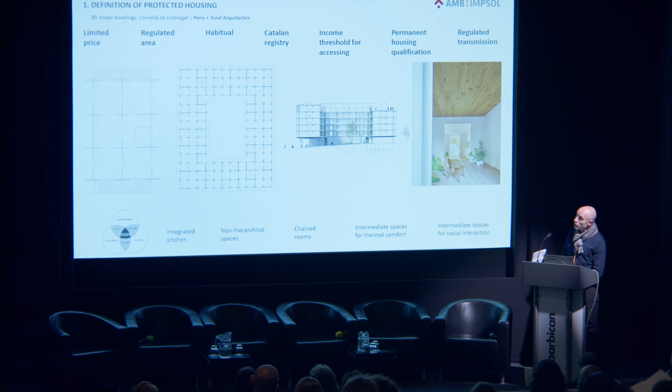This is a very special building for us. It's by Marta Peris and José Toral. It's 85 mixed dwellings in Cornellà de Llobregat. And as you can see, the unit of the building is not the dwelling, because it is the cell. The cell is 3.5 by

3.5 meters. It is inspired, or the authors say that it is inspired by a Japanese room, which is the more flexible one. So it's more or less 12 square meters, and moreover, every unit can be connected to the next one.

The standard type is 6 modules, so it's more or less 75 square meters, but it can be 4 modules, where the corner models are usually 4 modules. So depending on the model, it's 2 bedrooms or 3 bedrooms. You can see that there are 2 balconies.

One of the balconies gives facade to the inner courtyard, and it's the entrance. So that means that you can enter your dwelling by 2 spaces. So, for example, if you are a young architect and cannot afford to rent external space, you can put your office there, and you can receive your customers directly in a separate space of your house. So it's a very flexible model of living, because everything can be done there, and moreover, the units can change if things change, if things change during the years.

So this is the floor plan. We have 4 stories, and it all gives to an inner courtyard where the entrances are. This is an image of the building finished, and

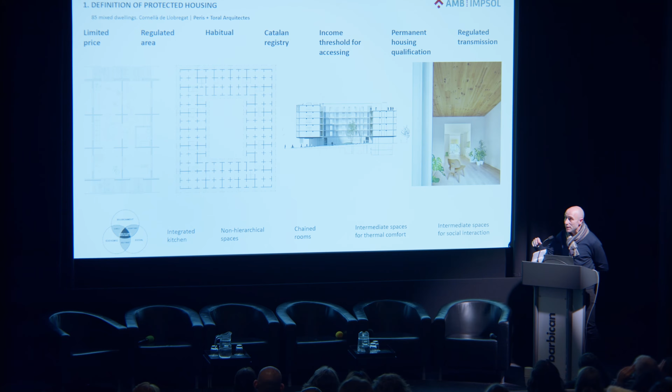And we are pushing towards intermediate spaces, social intermediate spaces, or thermal intermediate spaces. And these are images of the building. It's a famous building because we constructed it in 2020. It was designed in 2017, so more or less, so previously to the pandemic.

And it's constructed in timber. This building costs more or less 1,000 euros per square meter. That means that it's very, very cheap. But it's not cheap because in Spain, construction is cheap because it's cheaper than here, but not very cheap. So I think that architects are very clever.

Architects and the whole team, I think, to conceive this kind of building, everybody has to break their prejudices and accept new things. For example, the fences are very basic—there are thousands of meters of fences in this building—so we go with the cheapest option, constructed in timber. In Spain there's a lot of sun, so solar protection is very important for us, so the building is full of solar protections.

Continuing about the regulation, social housing in Spain can be for sale, for rent, targeted social housing, or cession of use—it's like we can sell the dwellings for a determined period of time. It can be cooperatives, but I'm not going to talk about cooperatives since that's been previously explained. And it can be like urban masoveria. It's strange, but it can be.

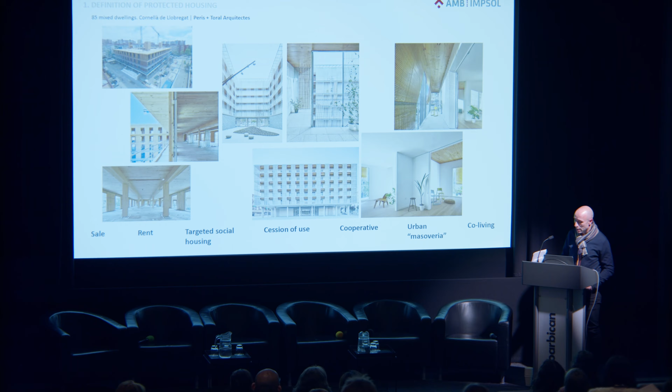There's a place and somebody pays by doing some works in the building, for example, and there are some models of co-living. This building is a mixed building between sale and rent, so 30% of the building is for rent and the other part is for sale. That means we paid for the land, and since we are non-profit organizations, we have to balance our economy. That means that if the municipality gives us the land, we promote social housing for rent, but if we have to pay, we have to balance our economy, so depending on the cost, we need to sell more dwellings.

So, housing designs and characteristics. We understand that social housing is permanent social infrastructure. What does that mean? Every building will remain there for more than 100 years, probably more than our lives. So we know who we are and how we live nowadays, but we don't know anything about what will happen in 20 years. That's why we are always pushing towards flexibility.

I think one of our main aims is architectural quality, so we follow exemplarity in our architecture, always controlling the cost. Our buildings have to be exemplary in energy efficiency as well, flexible, inclusive, and neutral, as I mentioned before. So we ask architects that all the spaces where housework has to be done have to have the same quality as the main spaces.

And we would like to generate identity in the building because we feel that helps people create communities. As I said before, we have to be self-sufficient financially, and that's the reason all the buildings have to have low maintenance.

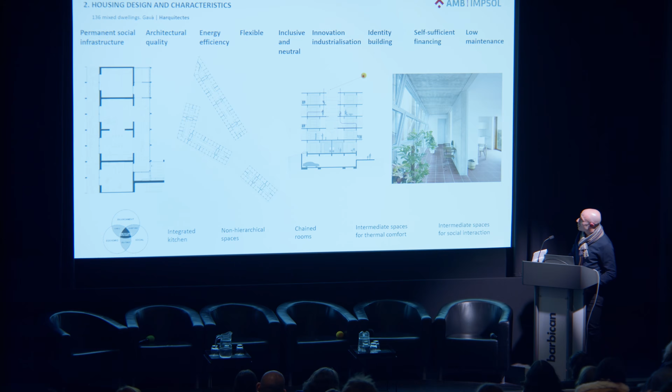We are trying to generate communities, so we always ask architects to come to the meetings in order to transmit directly the values of the building to the community. As IMPSOL, we explain who we are and why we are doing architecture like this, and we ask architects to come with us to explain. That's why we always ask in the competitions that the building has to allow a hall or a space to hold, at minimum, meetings for all the inhabitants.

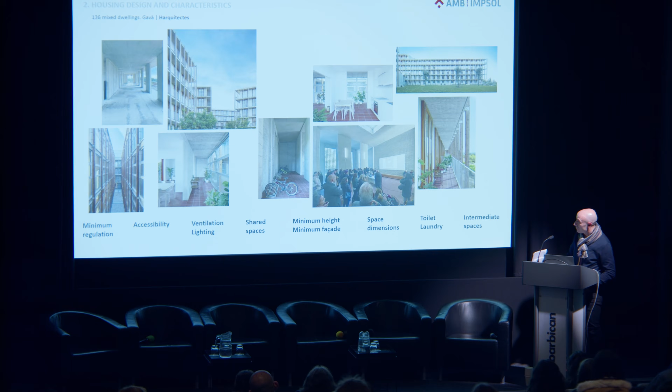How do we do that? We work as if we were technical services of the municipalities around Barcelona. So there's a decision and a commitment with municipalities where they give us the land or sell us the land, and there's a definition of actions, because sometimes we can go directly to the competition, or sometimes we need some planning. So there's the competition, which is a key point for us—I'll explain later. Then there's the implementation, the commercialization, always regulated by law, and the delivery. And then there's an important phase for us, which is maintenance and dissemination.

That's where we are pushing now a lot, because we felt that we explain these kinds of buildings to lots of places, but most of us are architects or linked to this profession. We need citizens to know about these buildings, why we are doing them, and what it means to live in a building like this. If we create identity, if we get people to feel proud of living there, they will transmit this value to others, and we gain power to continue doing these kinds of buildings.

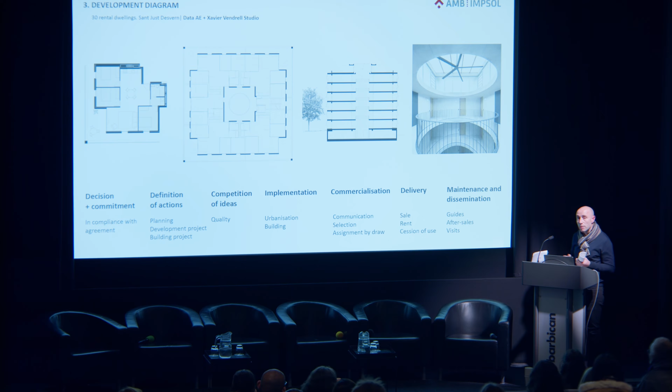For example, in this 30 rental dwelling building, we have an atrium inside that captures sun during the winter, and this ventilator pushes the air downstairs where dwellings can interconnect, or in summer it's the opposite. So we have some windows downstairs and we are creating crossing ventilation, but people have to understand how to use this kind of dwelling.

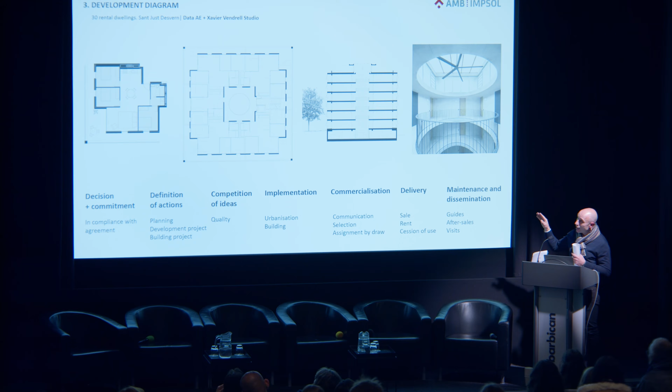Typologically, as you can see, in most of our dwellings the corridor disappears, so they are very optimized plans where all the bedrooms have more or less the same surface, between 10 to 12 square meters. Then you have the dining room and living room, which can be changed, because the dining room can be on the outer side, and inside we can have other uses.

Note that here the terrace has a big size, so it's the same size as a double room, more or less 12 square meters, because in Spain we love life outside.

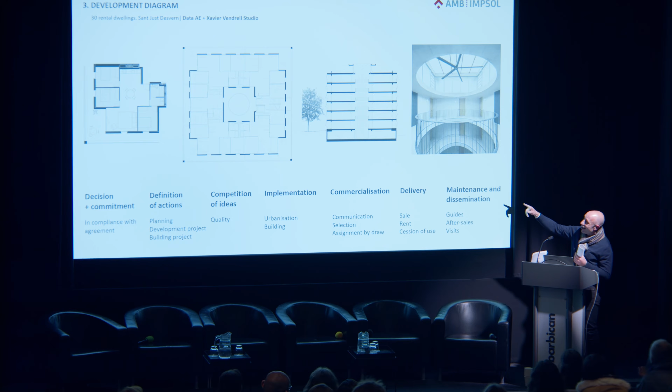I think it's clever that as most of the year we have a good climate, the balcony is like a corridor here, so there's multiple parkour in the dwelling. It's 5-story plus underground.

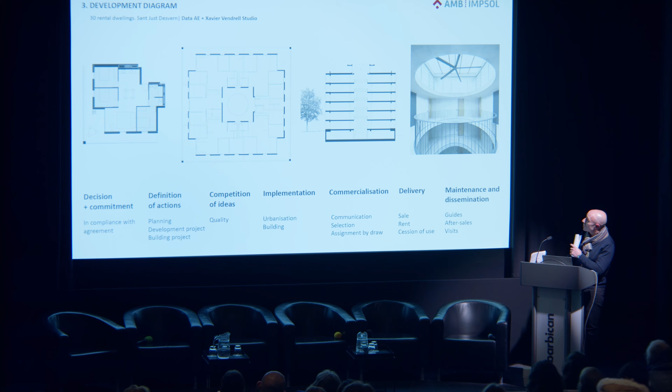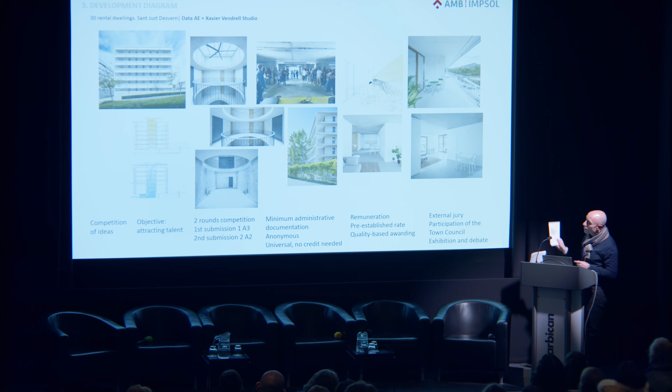These are pictures of this book, how we explain to people how this works, with a glossary and things like that, so people can understand what is inertia and things like that.

Aspects like solar protection, the meetings that we do with the customers, or the sizes of the terraces. I told you that one of the key points is the competition, because that's where we define how our buildings are going to be.

So first of all, when we get an agreement with the municipality, what we usually do is contract a sociologist so they help us know exactly what we need, because usually municipalities don't know what they need. They only ask for some dwellings. So we are trying to educate them to put social spaces in our projects, or to target well what we need.

Our main objective is to attract the best proposals from the best talent. How do we do it? We organize a 2-round competition. The first round is 1 A3, only with the idea, and we choose 5 from all the people that apply. The second round is 2 A2, with almost everything.

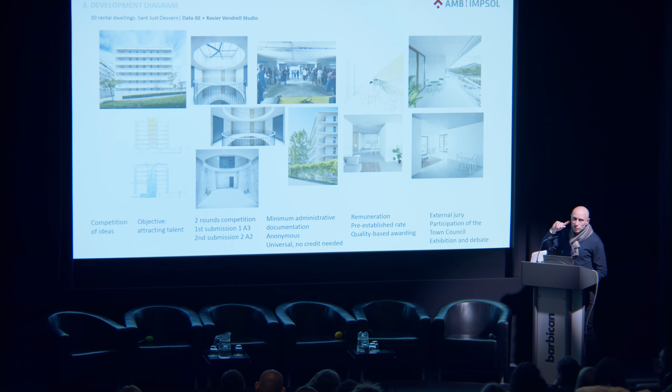It's minimum administrative documentation, completely anonymous, so we don't know who the architects are, and it's universal, so no solvency is asked for the architect. Recent graduate architects can apply to our competition, because, as I told you, for this building we have to think 50 years forward, so we need young people to understand what we are going to need for these new generations.

The point is that we are not crazy, so we ask these young architects to go with a solvent team, like a structural engineer, acoustic engineer, and installations engineer, things like that. So the collaborators have to have experience, but not the leadership of the team.

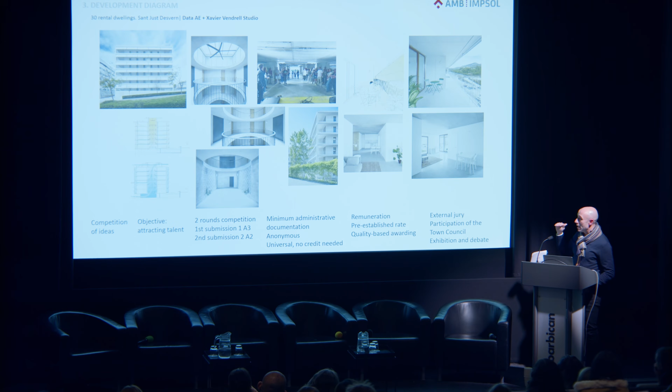We give them, I think, a good remuneration for the ones selected for the second phase, and the price for doing the project is pre-established. So the winning project only wins for the quality, not for the price. The best project is not going to be replaced by a second project, and it's not going to be constructed because of the price. So it's a pre-established rate and a quality-based awarding.

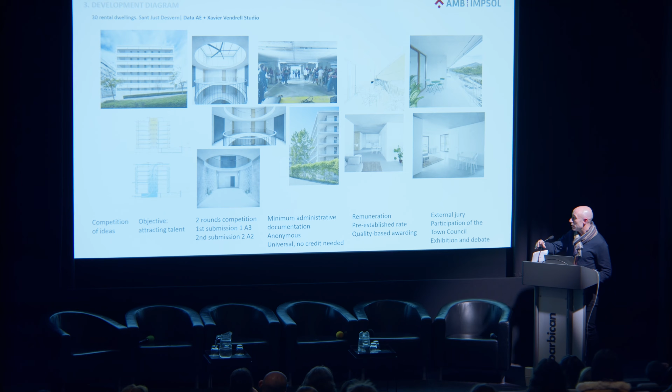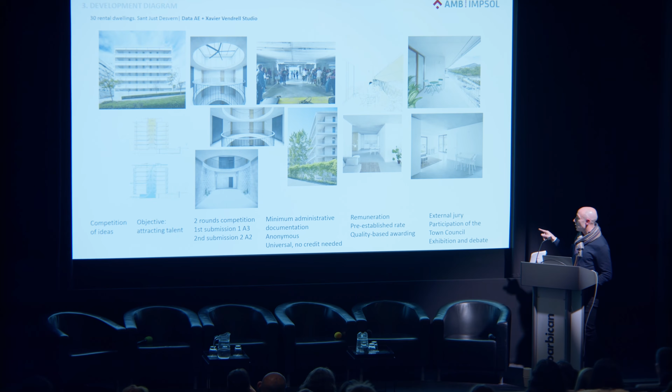There's always an external jury. Part of the jury is from IMPSOL, but part is outside, and the town council is always there because we need the town council as a member of the team - we don't want to fight against them. And in every competition there's an exhibition of the projects and a debate between the jury and the finalists, so everybody can argue or discuss about everything. I think it's a very transparent process.

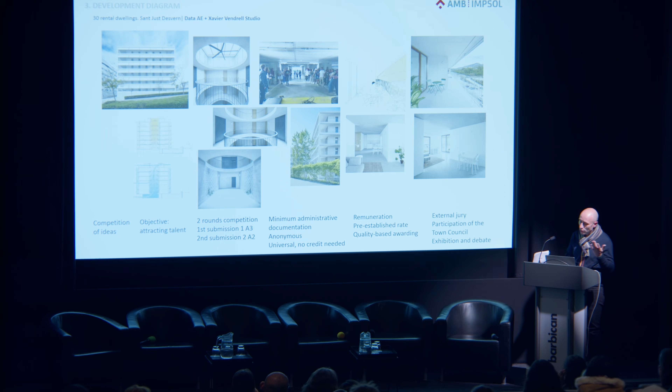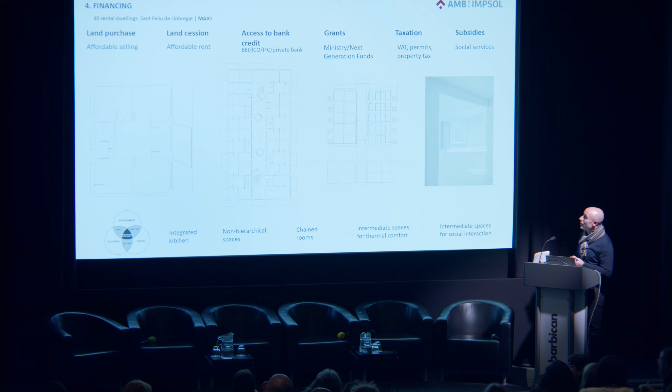Well, how do we finance? As I told you, if we have to purchase land, we are going to promote affordable or protected social housing for sale. But if there's a cession, it's social housing for rent. We act as if we were private, so we need mortgage, we need credit. So we usually apply to European Bank of Investments, or national banks, or local banks, or autonomic banks, or sometimes private banks.

We do not receive regular subsidies, but we are not silly. We are applying to all the grants that we can. So we usually apply to national grants or autonomic grants, but these grants are, for example, for sustainability, and the private sector can apply as well. So if you are very sustainable, you can get some grants.

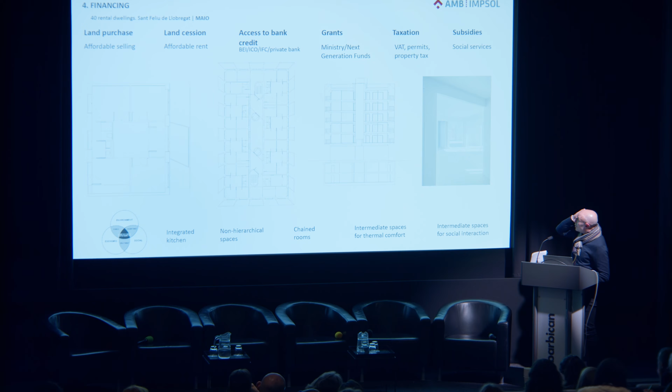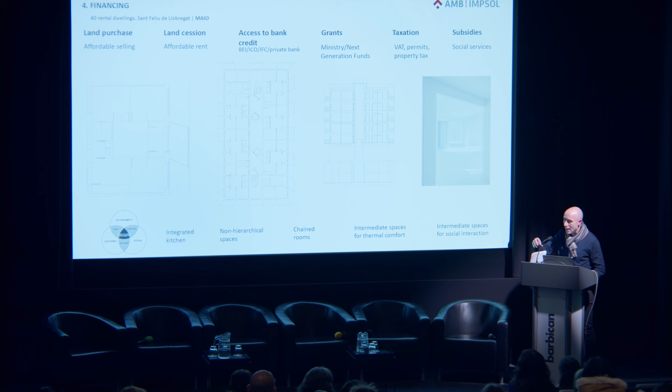Well, we pay VAT, we pay permits, we pay property tax, we pay everything, so it's very hard. And our law regulates the price, as I told you, to rent or to sell. That means that we cannot give society dwellings for emergency situations, because the most important thing is that we have to be sustainable in order to promote more social housing. That means that we can rent the municipality some of the dwellings in order they put into the social housing market for emergency situations through social services. That means they paid us the rental price, and they can subsidize citizens.

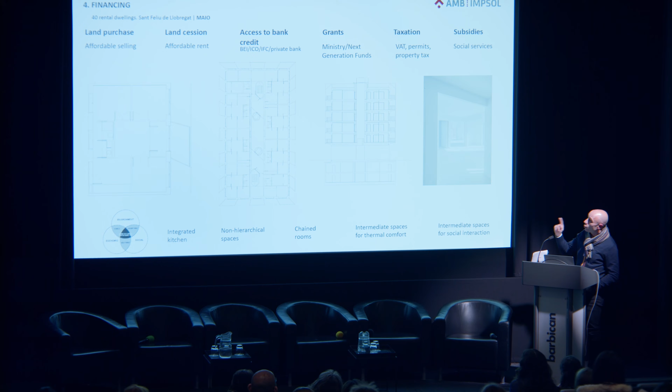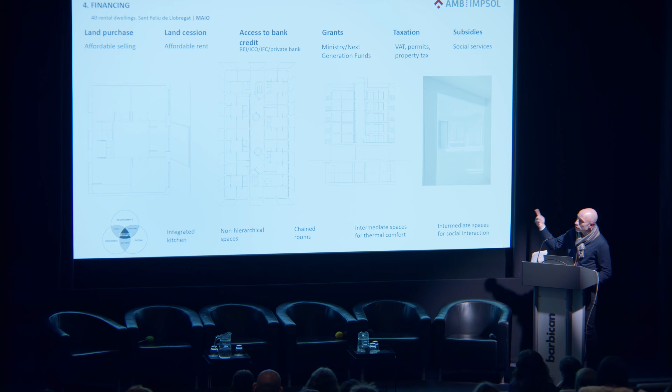This 40 rental dwelling, it's interesting because it's like 5.5 modules of more or less 10 square meters. That means it's a surface of 55 square meters, and the entrance is through the kitchen, and in diagonal you can have the kitchen, the dining and the living, because in Spain 55 square meters is more or less a two bedroom flat. But in this apartment you can have 3 double bedrooms as well, because you have 4 spaces of 10 square meters, two of them linked.

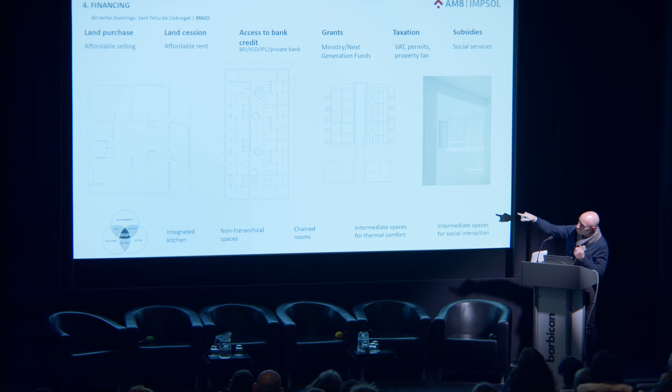All are linked, but the kitchen and the dining is directly linked. The other 3 have double doors. It's very flexible because you can put any activity where you want. Moreover, the bathroom is linked to 2 of these spaces because it has two doors. In Spain, the bathroom cannot give directly to the kitchen, which is different from the Netherlands.

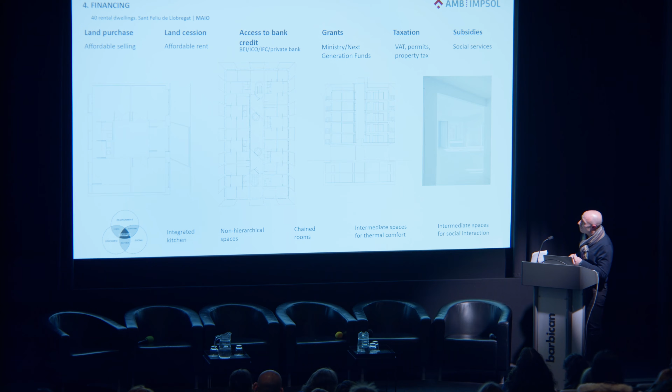This is an image of the living, and this is more or less the same. Big balconies. It was not finished at that time because we were explaining about the building to the future inhabitants, and some images of the building.

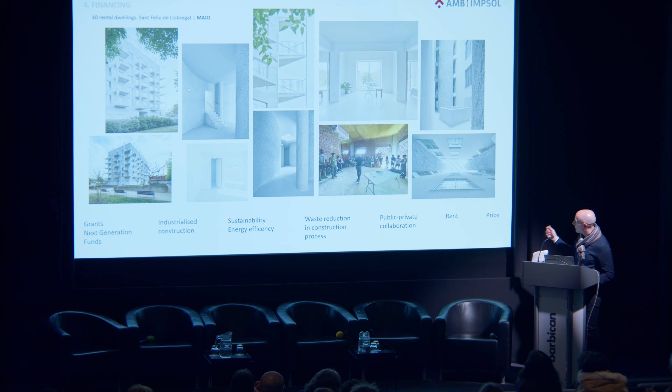When I told you that we apply for the grants, usually grants in Spain are for industrialized construction, for sustainability and energy efficiency, for waste reduction in the construction process. If you collaborate public and private, sometimes there are grants, and there are grants for rent. If the rental price is lower than the law of social housing, you can get some grants.

We promote affordable social housing for rent and for sale, but in AMB, the organization where we depend, there's a department that analyzes where we should construct the buildings, how many buildings are there empty, or how many dwellings, or things like that. So they provide us data to decide the policies.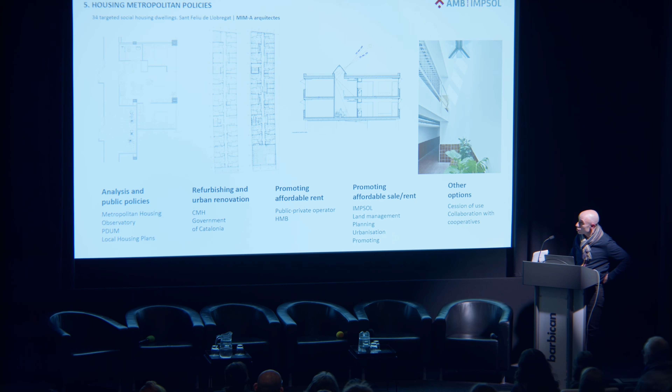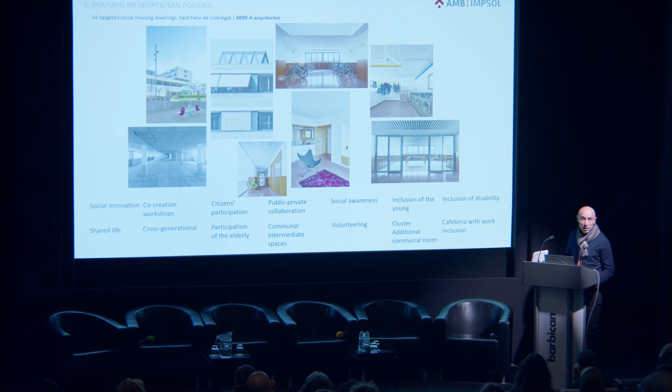And I will finish with this image because we think that we have gone further with typological innovation and technological innovation, and we are pushing with social innovation. So all these kind of things that people from Switzerland have explained to us. So we are trying to work with clusters, with the inclusion of the young or the elderly. We are planning to promote a building where people with functional diversities can live more or less alone. So all these kind of things we expect will be common in a few years. Thank you very much.